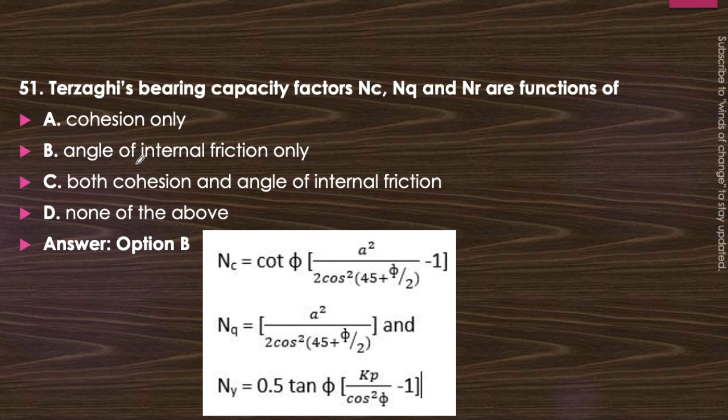Okay, so answer B will be the correct answer. It is dependent on angle of internal friction only. These are the constants A and Kp, these are the constants, only it will depend upon the phi value, that is angle of internal friction, and cohesion has no role to play in Nc, Nq and N gamma.

Okay, next question. Valid range of S, the degree of saturation for soil in percentage is: S more than 0, S less than 0, S lying from 0 to 100, or S lying from 0 to 100 including 0 and 100. So what is S here? S is degree of saturation, that is volume of water divided by volume of voids. So what will be the answer here?

Just think about it. Degree of saturation will be 100% if all the voids are filled by water, and degree of saturation is 0% if all the voids are filled by air, there is no water in it. So these both are possible values. So the answer here has to be lying from 0 to 100 inclusive, that is option D will be the correct answer. It is volume of water divided by volume of voids.

Volume of voids is composed of volume of water and volume of air. So this will vary from 0 to 100. When it is 0, it will be dry soil. When it is 100, it is fully saturated soil.

Next question. If the natural water content of the soil mass lies between the liquid limit and plastic limit, the soil mass is said to be in liquid state, plastic state, semi-solid state or solid state. It is a very easy question. You just memorize the graph of volume change with respect to the moisture content. In that graph, there were lines, liquid limit, plastic limit and shrinkage limit, and there were regions of liquid, plastic, semi-solid and solid. So just think about it.

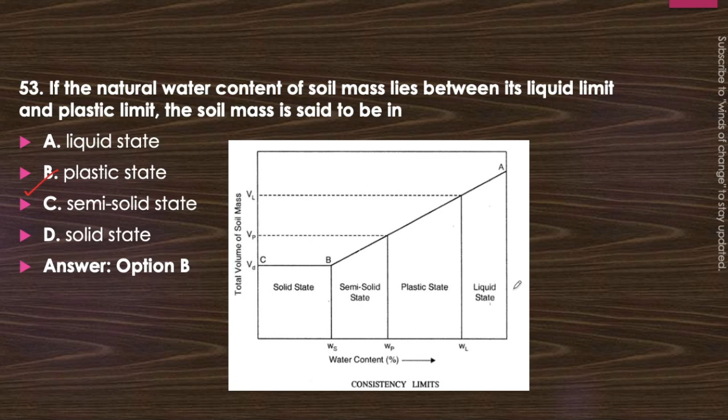So the answer between liquid limit and plastic limit is plastic state. Okay, option B will be the correct answer. Just memorize this graph. This is very important. Keep it in your mind. This is liquid limit, plastic limit and shrinkage limit. Now above liquid limit, this side it is liquid state. Between liquid limit and plastic limit, this is plastic state.

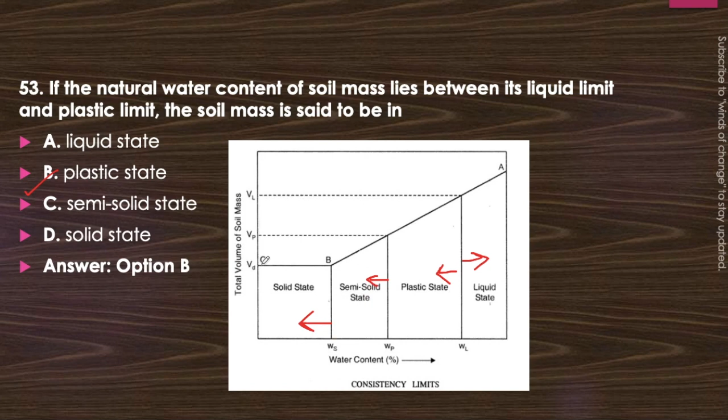And from plastic limit to shrinkage limit, it is semi-solid state, and below shrinkage limit it is solid state. Okay, there will be no volume change below shrinkage limit. Memorize this. These are very important. And at this shrinkage limit, the volume is called dry volume. Okay, so memorize it. Next question.

The flow net for an earthen dam with 30-meter water depth consists of 25 potential drops and 5 flow channels. The coefficient of permeability of the dam material is 0.03 mm per second. The discharge per meter length of the dam is, we have to determine small q, that is discharge per unit length. The options are 0.00018 m cube per second, it is written wrong, 0.0045 m cube per second, 0.18 m cube per second or 0.1125 m cube per second.

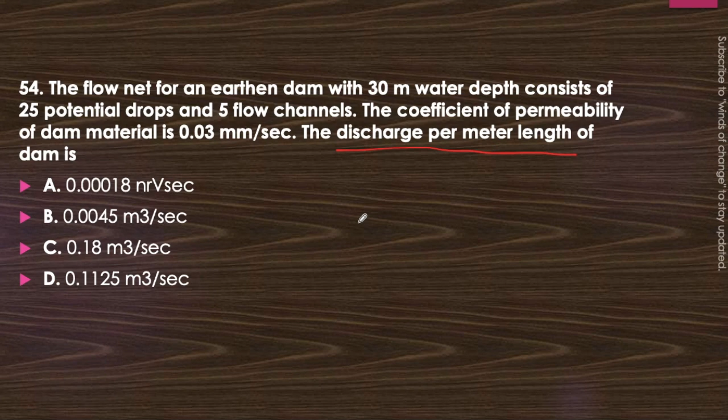So just think about how you will solve it. You should know the formula here, the formula for discharge per unit length if you have been provided with K value, that is coefficient of permeability, number of potential drops, number of flow lines and water depth. Can you recall it? Think about it. You can pause this video and solve it. I am moving to the solution. It is q equal to K H Nf by Nd.

Memorize it in the seepage calculation. This formula is very important. That is discharge per meter of length. This is permeability, coefficient of permeability K into water depth into number of flow lines divided by number of potential drops. Okay, so keeping this in your mind, we should solve it.

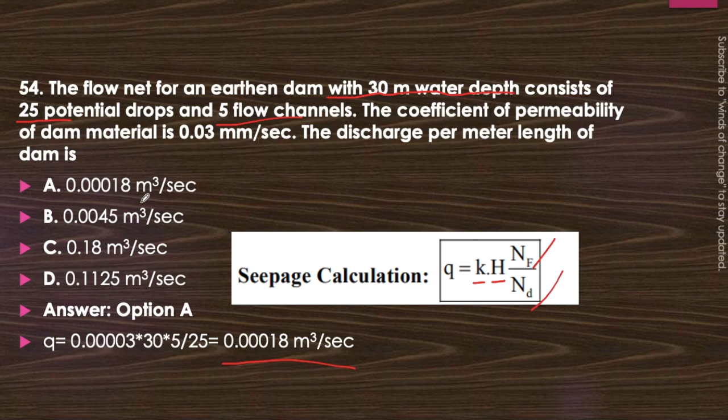Q equal to K value is 0.03 mm per second, so we should convert it into meter per second, into H, that is 30, it is the water depth, that is 30 meter. NF, number of flow lines, that is given 5 flow channels, and ND, that is number of potential drops, that is 25. So this answer will come out to be 0.00018 m cube per second. Okay, this will be the answer.

Okay, next question. Average coefficient of permeability of natural deposit parallel to stratification is always greater than that perpendicular to stratification, or parallel to stratification is always less than that perpendicular to stratification, or is always same in both directions, or parallel to stratification may or may not be greater than that of the perpendicular to stratification.

So coefficient of permeability in horizontal and vertical direction, if we have to find out the equivalent coefficient of permeability, if there are so many layers, then there are two formulas for it. One is weighted average and second one is the reciprocal mean. In both, which one will be having the larger value, that we have to determine. Now one is parallel to stratification, other one, the vertical, is perpendicular to stratification. What will be the answer?

Just think about it. Okay, KH value is more than KV value always, because arithmetic mean is more than reciprocal mean. It is always true. You can see here KH, that is for horizontal flow, it is K1H1 plus K2H2 up to KNHN upon total thickness, and KV is sigma H upon sigma H upon K, and KH is always more than KV. Memorize it, it is also very important. KH value will always be more than KV.

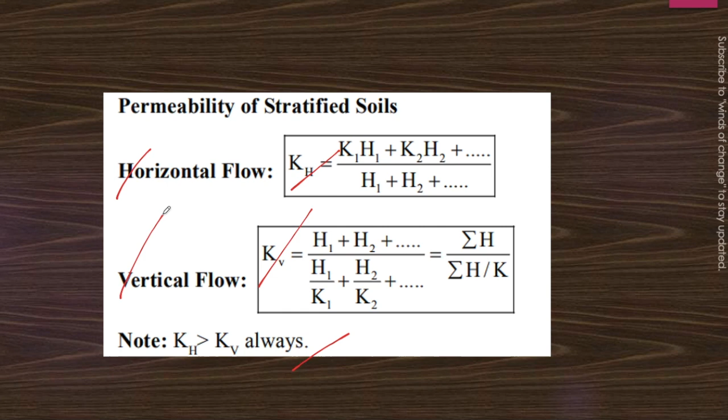Okay, so the first statement says that coefficient of permeability parallel to stratification is always greater than that perpendicular to stratification. Okay, this will be the correct answer. Parallel to stratification is the horizontal flow and perpendicular to stratification is the vertical flow. Memorize it. It is also important to memorize which flow is called what. Parallel is horizontal, perpendicular is vertical.

Okay. Next question. For proper field control, which of the following methods is best suited for quick determination of water content of soil mass? Here they are saying about the proper field control. That means we have to determine the water content in the field. It is not a laboratory case, it is for the field. Now all these options are mainly for the field except oven drying. Oven drying will be done in laboratory and obviously it will take a lot of time.

Now we have to determine quickly, can we go for sand bath method or alcohol method or calcium carbide method? So in this one the best suited will be, think about it. Okay, the best method here will be calcium carbide method. That will be best suited here. Option D will be the correct answer. With respect to the quick determination of water content at field in a proper controlled manner, it will be calcium carbide method. How is it so?

This is the calcium carbide apparatus and this test is done to determine the water content in the soil by calcium carbide method as per IS 2720-1973. It is a method for rapid determination of water content from gas pressure developed by reaction of calcium carbide with free water of the soil. Calcium carbide reacts with free water and produces a gas, and on that basis we find out how much pressure is developed by the gas, and the moisture content is in that proportion.

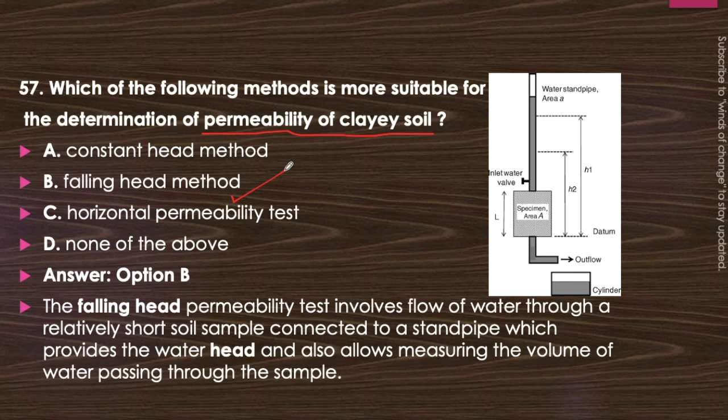The falling head permeability test involves flow of water through a relatively short soil sample connected to a stand pipe. This is called stand pipe, which provides the water head and also allows measuring the volume of water passing through the sample. In this there will be difference in the head, that is difference in the level of the water, and through the time in which this difference has been developed, we will determine the permeability of the clay soil. So for clay soil, the best suited method to determine permeability is the falling head method. Okay, moving on to next question.

If water content of a fully saturated soil mass is 100%, then the void ratio in the sample is, this is very easy question, less than specific gravity of soil, equal to specific gravity of soil, greater than specific gravity of soil, or independent of specific gravity of soil. If you remember one formula here, that is e by w equal to G by S, then you can easily determine it. Just think about it. You can solve it also on a paper. So I am telling you the solution here.

The relation is e by w equal to G by S. Now it is being said that it is fully saturated soil. Fully saturated means the S value, that is the degree of saturation, will be 1, that is 100%, and it is also said that water content is 100%, that is its value is also 1. This w is 1 and this S is 1. So what will be the result here? It will be e equals to G, that is void ratio is equal to specific gravity. So the answer will be equal to specific gravity of soil, that is option B. Got the concept, and this formula is very important. Keep it in your mind always. Next question.

Dispersed type of soil structure is an arrangement comprising particles having: face to face or parallel orientation, edge to edge orientation, edge to face orientation, or all of the above. Can you memorize it? Dispersed type of soil structure and flocculated type of soil structure were two types of soil structure which are very famous. Now think about the answer here. In the dispersed type of soil structure, what will be the arrangement of the particle? Think about it.

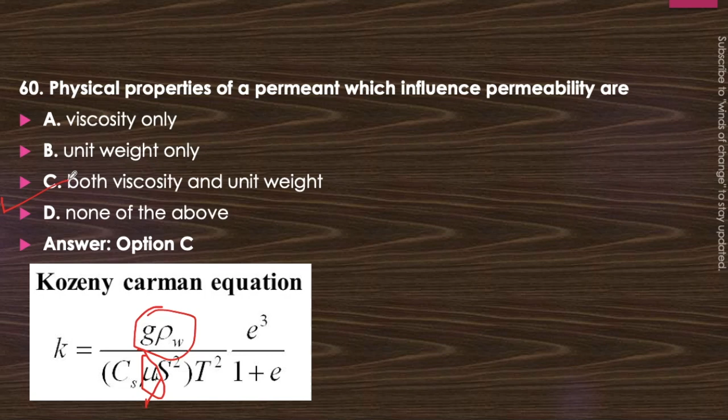So you can see here that these both are affecting the permeability of soil. So both will be the answer, that is both viscosity and unit weight. Okay, so C will be the correct answer.

Next question. If the volume of the voids is equal to the volume of the solid in a soil mass, then the values of the porosity and void ratio respectively are. We have to find out the porosity and void ratio, and it is being said that volume of void, Vv, equals volume of solid, Vs. In the case of Vv equal to Vs, what will be the answer? Now what is the formula for the void ratio?

Void ratio e equal to Vv upon Vs, that is volume of void upon volume of solid. Since Vv is equal to Vs, this value will be 1. And the formula for the porosity in terms of void ratio is porosity n equal to e upon 1 plus e. So it will be 1 divided by 1 plus 1, that is 1 upon 2, that is 0.5. And the answer having porosity as 0.5 and void ratio as 1 is option C.

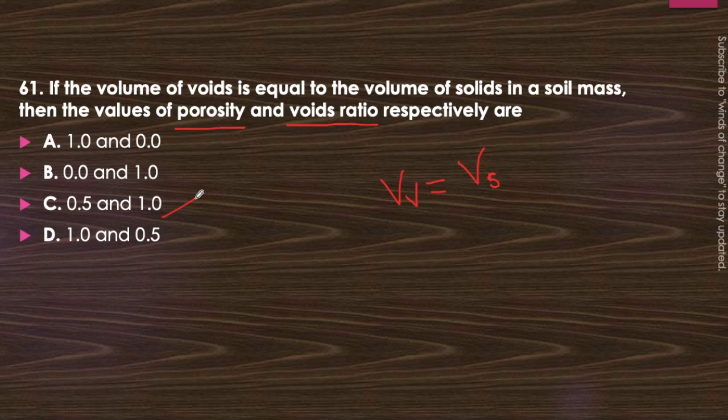Okay, since e equal to 1, these are the formulas here, and porosity n equal to Vv upon V. So if we find out the void ratio and porosity relation, we will come to know that n equal to e upon 1 plus e, that is 1 by 2 equal to 0.5. So it is very easy question. So moving further, next question.

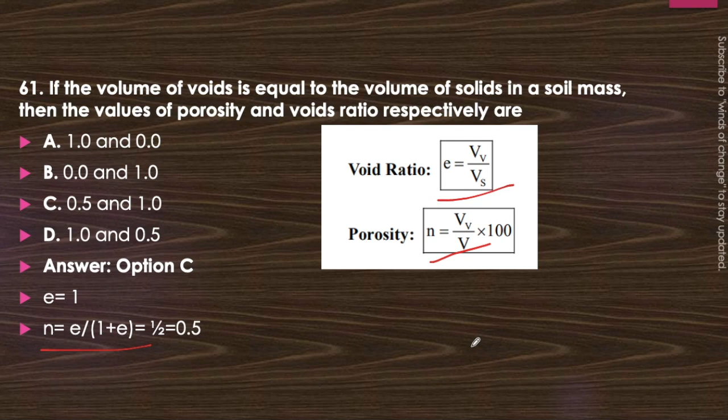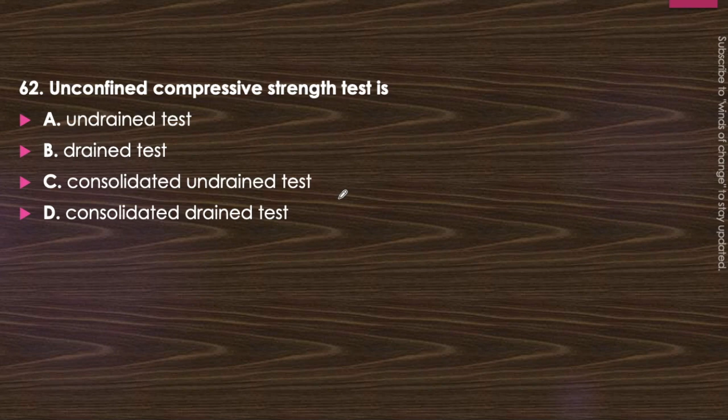Unconfined compression test is undrained test, drained test, consolidated undrained test, or consolidated drained test? This is important question. Just think about it. Unconfined compression test: in this test, there is no cell pressure and the soil is directly placed under the load in the form of cylindrical sample. Now think about the answer. Unconfined compression test is undrained test. Now how it is so?

The primary purpose of the unconfined compression test is to determine the unconfined compressive strength, which is then used to calculate the unconsolidated undrained shear strength of clay under unconfined condition. So there should be unconsolidated term added here. Unconsolidated undrained test could be the answer. Since both the options were having consolidated, these were not possible. Drained condition is not possible, so the answer becomes undrained test.

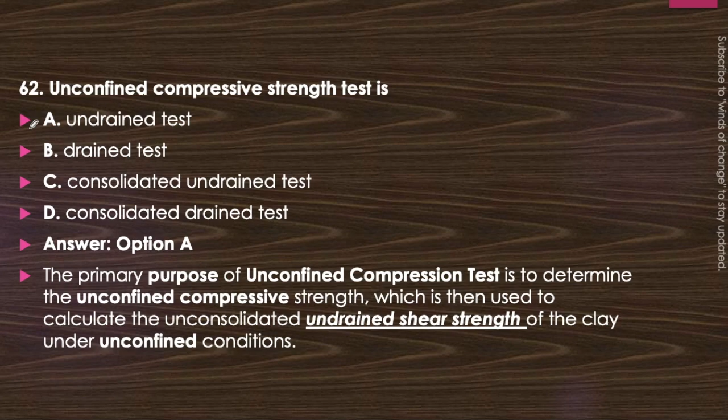Moving further. In a triaxial compression test, when drainage is allowed during the first stage, that is application of the cell pressure only, and not during the second stage, that is application of the deviator stress at constant cell pressure, the test is known as consolidated drained test, consolidated undrained test, unconsolidated drained test, or unconsolidated undrained test. This is very easy question. First condition is for first term and second condition is for second term. Which one will be the answer? Think about it.

First condition given here is drainage is allowed, and in the second condition drainage is not allowed. So second condition, drainage not allowed, it will be undrained test. So possibilities are either B or D. A and C are not possible because both are drained condition in the second term, that is when the deviator stress is applied.

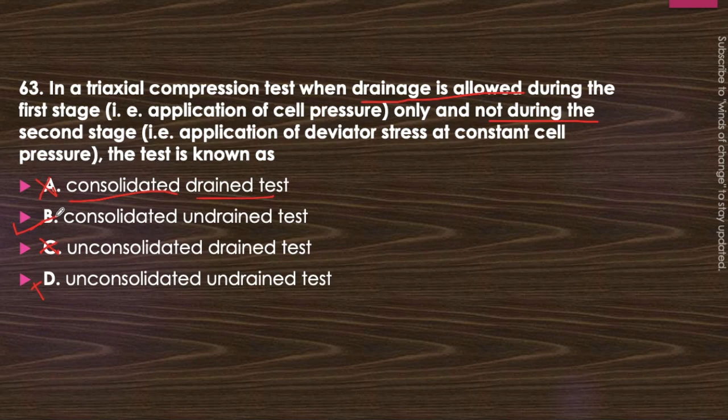Now in the first condition, if the drainage is allowed, then there will be consolidation. If you allow the drainage, there will be change in the volume, and consolidation will occur. So the answer will not be D, it will be B, that is consolidated undrained test. Option B will be the correct answer here.

Moving to the next question, the total discharge from two wells situated near to each other is: sum of discharge from individual wells, less than the sum of discharge from individual wells, greater than the sum of discharge from individual wells, or equal to larger of the two discharges from the individual wells. So let's think about it.

If there are two wells, if they are far apart, then obviously it will be the sum of these two discharges. That will become very easy. But since they are very near to each other, there will be an effect of one well on the other and the other well on the first one, and through that interference there will be some effect that will either lead to a higher or lower value.

Now what will be the answer here? Will it lead to higher discharge, that is more than the sum of these two, or lower than the sum of these two? The maximum value that can be obtained here is the sum of the discharges from the individual wells, which is not a possible condition here, because it can only be obtained when both wells are very far apart from each other, so that the radius of influence of one well does not coincide with the radius of influence of the other well. Only then will this condition be applicable.

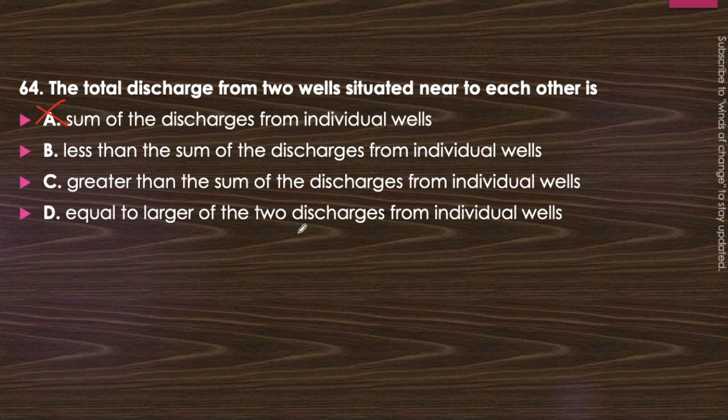Now without wasting much time, let's focus on the answer. The total discharge will be less than the sum of the discharges from the individual wells. Think about it. Generally, well fields designed for water supply purposes should be spaced as far apart as possible to minimize the well interference. Well interference, this term is very important. We should minimize the well interference as much as possible because it decreases the total discharge, which in turn will minimize the drawdowns.

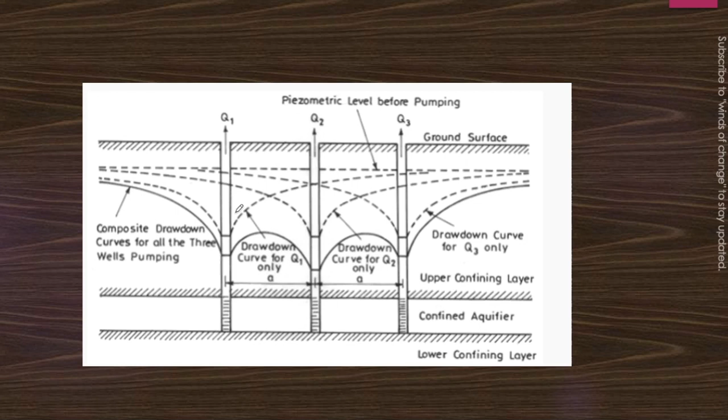If wells are spaced too closely together, the amount of well interference could be very high. The more the well interference, the lesser the discharge. You can see here, these are two wells which are close to each other. The influence of one will be on the other one. So there will be well interference, and this will lead to a lower discharge than the sum of these two discharges. So moving to the next question, that is question number 65.

The total and effective stress at a depth of 5 meters below the top level of the water in a swimming pool are respectively. Usually swimming pools are not made for a depth of 5 meters, but we are taking a condition here. At a depth of 5 meters, the total and effective stress will be either 0 and 0, or 0.5 and 0, or 0.5 and 0.5 kg per centimeter square, or 1 and 0.5 kg per centimeter square.

Now at a depth of 5 meters, think about it. There will be some total stress because of the pore water pressure from only the water present there. That pore water pressure will be equal to the total stress, and effective stress is the difference of total stress and pore water pressure. So obviously the effective stress will be 0 and there will be some positive value of total stress. So the correct answer here will be B.

Now let's find out how it is true. Pore water pressure is the total stress, since only water is there. Pore water pressure will be the unit weight of water in kg per centimeter cube into depth. The unit weight of water is 1 gram per centimeter cube, which in kg is 0.001, into the depth in centimeters. It is 5 meters, so 500 centimeters. So it will be 0.5 kg per centimeter square, that is the pore water pressure.

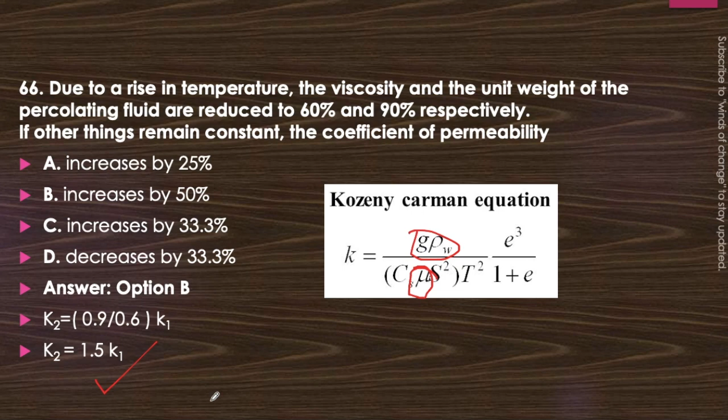At liquid limit, all soils possess: same shear strength of small magnitude, same shear strength of large magnitude, different shear strength of small magnitude, or different shear strength of large magnitude. Now at the liquid limit, will the shear strength value for each type of soil change or not? First of all, we have to find out that. Then whether it will be of small magnitude or large magnitude. So there are two questions in front of us.

First of all, think about the magnitude. Since at the liquid limit the soil has just started gaining plasticity; before that it was totally a liquid kind of soil with no plasticity. So the shear strength will be very low, approximately zero. So there are two possible answers, either A or C, in which small magnitudes are given. Now if we talk about shear strength, there will not be any change in the shear strength for different kinds of soil.

If the C value is the same, obviously this will be the same, that is, the same shear strength for different types of soil, of small magnitude. Answer A will be the correct answer. The undrained shear strength of soil at liquid limit can be considered to be around 1.7 kN per meter square for each type of soil.

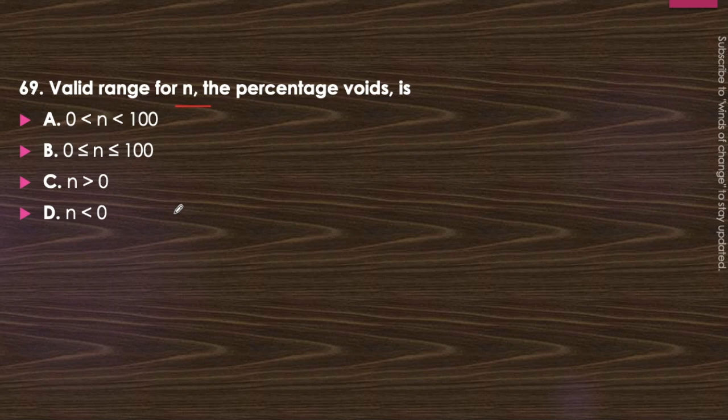Next question. Valid range for n, the percentage voids, that is the porosity. Porosity lies from 0 to 100, either excluding or including 0 and 100, or n more than 0, or n less than 0. Just think about it. It is volume of voids to the total volume of soil. If the volume of voids is equal to the volume of the soil sample, the value will be 100, meaning no solid is present. While if there is no void, it will be equal to 0. So in both situations, this value lies from 0 to 100.

But think about it, this value cannot be 0. Why? Because a case with no voids is not possible in the macro structure of the soil. There will always be voids present within the soil mass. Even with much higher compaction, there will still be some voids remaining. You cannot fill it totally 100% by removing all the voids. So obviously there will be some volume of voids, so it cannot be 0.

While 100% means there will be only voids and no solid. If there is no solid, then there is no soil, and obviously there cannot be a 100 answer. It is not a soil, it will become only air. So these two values are not included, and the value lies between 0 and 100.

Okay, next question. Rankine's theory of earth pressure assumes that back of the wall is plane and smooth, plane and rough, vertical and smooth, and vertical and rough. There are two assumptions in the soil which are very important. First of all, Rankine theory of earth pressure. Secondly, the assumption in Terzaghi theory. So these two are important.

Terzaghi theory I have asked in previous video, and in this video we will talk about Rankine's theory of earth pressure, the assumption in it. So what will be the answer here? The plane of the back of the wall is assumed to be, think about it, vertical and smooth. Okay, it assumes that there is no angle, it is totally vertical at 90 degree, and there is no roughness in it. Okay, option C will be the correct answer.

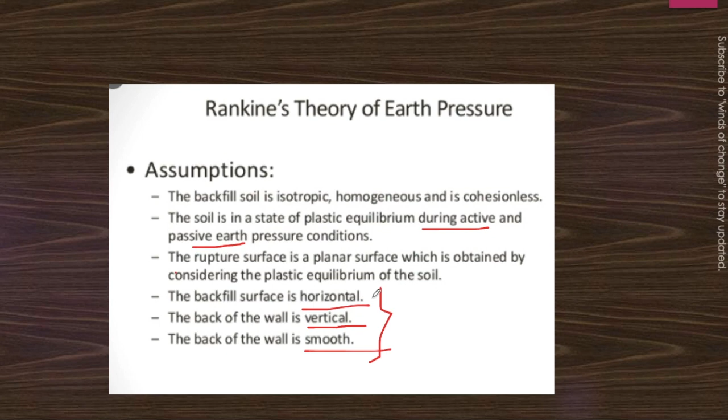Now moving further, the most suitable method for drainage of the fine grained cohesive soil is well point system, vacuum method, deep well system, or electro-osmosis method. Here we are talking about drainage of fine grained cohesive soil. Which will be the correct answer here? Most suitable method for it, either well point or vacuum or deep well or electro-osmosis. Just think about it. It is not so important question, but you should know it. The answer that will be

electro-osmosis method. In the electro-osmosis method, consolidation can be an effective and viable technique to drain, consolidate, and strengthen the saturated fine grained soil. As the water is drained out, a negative pore water pressure is generated, which introduces the consolidation process in the soil. In this, negative pore water pressure will be generated, and consolidation will occur. This process is used for strengthening the soil. Okay, so this is the most suitable method, that is electro-osmosis method.

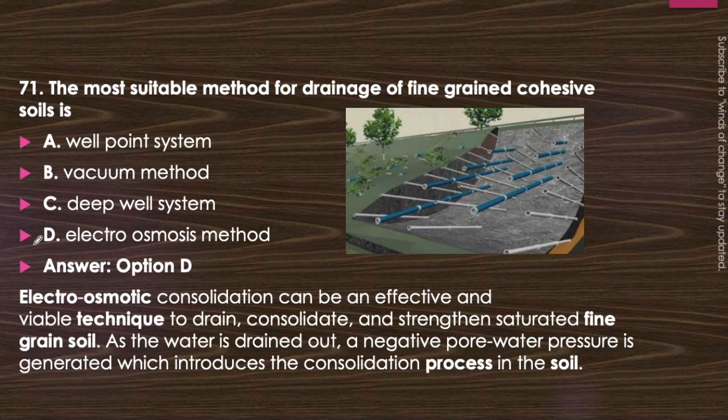Next question. With the increase in the amount of compaction energy, optimum moisture content increases but maximum dry density decreases. Optimum moisture content decreases but maximum dry density increases. Both optimum moisture content and maximum dry density increase, or both decrease. Now think about this question, very important question. If you remember the graph of dry density with respect to moisture content, there were so many graphs that can be obtained to find out the optimum moisture content at which the dry density will be maximum.

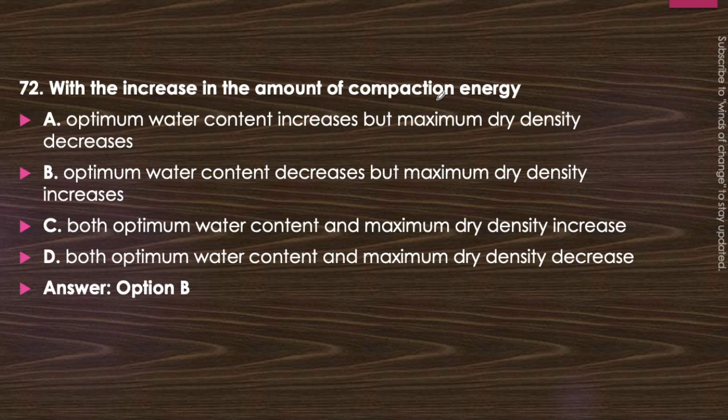Now think about the answer here. If we increase the compaction energy, then we are sure about one thing, that dry density will increase first of all. Okay, and optimum moisture content. If we go for the dry side of soil, then obviously the moisture content will decrease. Since dry density is increasing, there will be lesser void, so lesser amount of water will be required. So optimum water content will decrease. So the answer will be option B. That is, optimum water content decreases but maximum dry density increases.

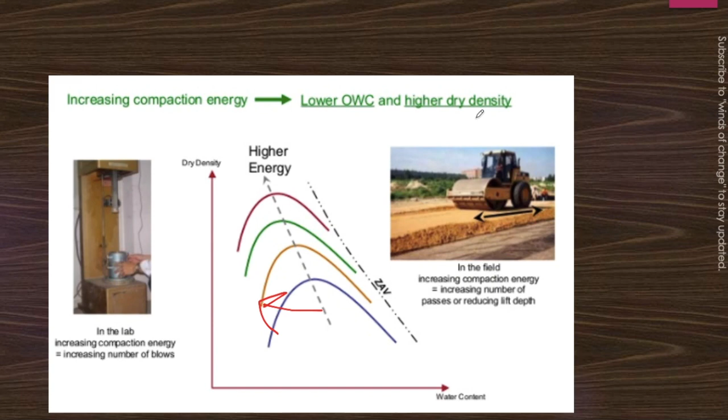How it is so? Let's see the graph here. We can notice that with increase in the compactive energy, this is for the lowest energy, then compaction energy is increased, and we can see this graph is shifting towards the left side. If the graph is shifting left, then we can say that water content is decreasing and dry density is increasing with increase in the compaction energy. Okay, so with increasing compaction energy, lower optimum water content and higher dry density will be obtained.

So next question, which of the following method is most accurate for the determination of the water content of the soil in laboratory? Oven drying, sand bath, calcium carbide or pycnometer method? Now here we are talking about water content determination in laboratory. Last time we were discussing the most accurate method in the field. Now in the laboratory, which method will be most suitable?

Just think about it. Very easy question. In the laboratory, we go for the oven drying method. Option A will be the correct answer. We will go for the oven drying method in the laboratory. This will be the most suitable method here, the most accurate method here.

In the oven drying method, this technique is done to determine the water content of the soil as per IS 2720 Part 2. You can read it if you want to go into the detail of this method. This is also very important. You can pause this video and watch this IS code, that is IS 2720, in which the oven drying method and its procedure is mentioned.

The water content of the soil sample is equal to the mass of the water divided by the mass of the solid. So in oven drying, first of all we take the total mass, then it is oven dried, and then again the soil mass is taken and the difference is observed, which will be the weight of the water. The second time there will be only solid, so weight of water upon weight of solid can be obtained, which will be the water content. So this is the oven drying method to determine the water content of the soil in the laboratory, and this is the most accurate method.

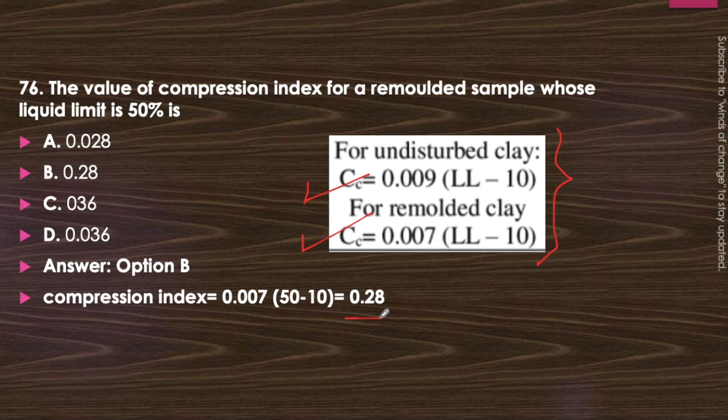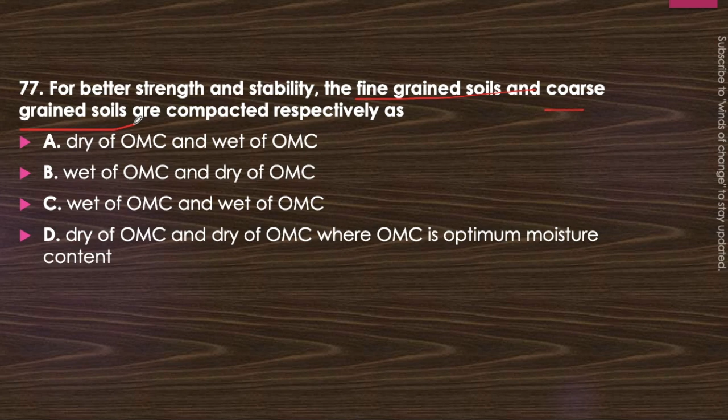There will be some gradation of the soil, so obviously the smaller size particles can fill the voids of the larger size particles. It will be accelerated by the amount of water. So wet of optimum moisture content will be applicable in case of the fine grained soil.

But in the coarse grained soil, since it has larger size particles, we will go for dry of optimum moisture content. So the answer here will be option B, that is wet of optimum moisture content for fine grained soil and dry of optimum moisture content for coarse grained soil. Okay, memorize it. It is also very important.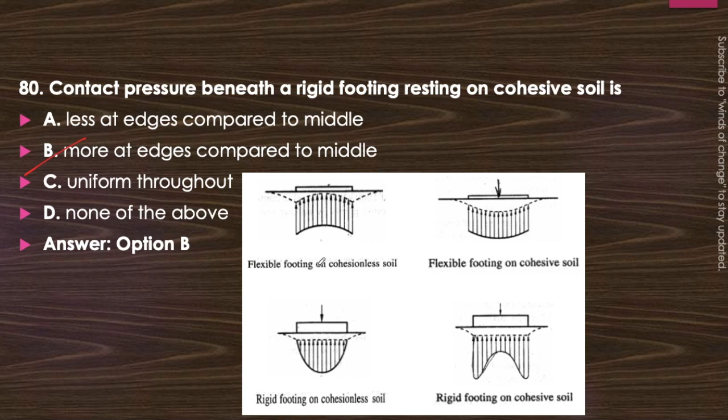While in case of the rigid footing, there will not be uniform pressure throughout, there will be pressure varying. It will be more at the center and less at the edges in case of the cohesionless soil. While in case of the cohesive soil, that is our case here, there will be more pressure at the edges and less at the center. Okay, so it will be answer B, that is more at the edges as compared to the middle. And these four conditions are very important. Memorize it. I am moving further.

Next question. Select the incorrect statement. Effective angle of shearing resistance increases as the size of particle increases, as the soil gradation improves, is limited to maximum value of 45 degree, or is rarely more than 30 degree for fine grained soil. Now we have to find out effective angle of shearing resistance. This phi value, that is angle of internal friction, or angle of shearing resistance, will be obtained from the formula tau equal to C plus sigma tan phi. This value will range from which limit? Think about it a little.

Let's find out the answer here, that is it is limited to maximum value of 45 degree. Now how it is so? This tau f value is equal to C plus sigma tan phi. Now if we write the formula for tan phi, it will be tau minus C upon sigma. The maximum value of tau minus C can be available when these two will be maximum, and the cohesion will be negative if it goes to this side. So the maximum value that can be observed for tan phi is when C equals 0 and sigma becomes equal to tau.

So the maximum value that can be obtained will be tau f upon sigma equal to 1, that is tan phi will be 1, and that means the phi value will be 45 degree. So the maximum value that can occur for phi, that is angle of internal friction, will be 45 degree. Always memorize it. Moving to the next question.

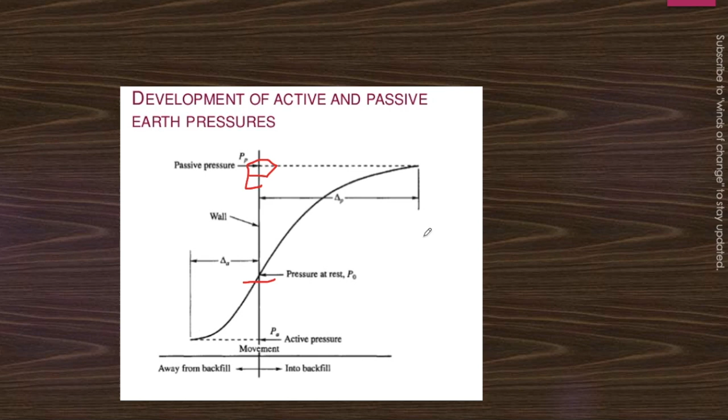When the plastic limit of a soil is greater than the liquid limit, the plasticity index is reported as negative, 0, non-plastic, or 1. Now just think about it. It is said that plastic limit is greater than liquid limit. Is it possible? We have already seen the graph of volume change with respect to water content, on which the Atterberg limits were placed. If the liquid limit and the plastic limit become equal, the plasticity index is 0. That is the condition of non-plastic soil.

But since they are talking about plastic limit greater than liquid limit, which is not a possible condition, we will say this value will be 0. The plasticity index, which is the difference of the liquid limit and plastic limit, will be 0. We should not think about this situation further, because the plasticity index will always be more than or equal to 0. So this minimum value, 0, will be the answer.

Next question. Void ratio of the soil mass can never be greater than unity, be 0, take any value greater than 0, or take values between 0 and 1 only. Think about the formula of void ratio: volume of voids upon volume of solids. Can volume of voids be greater than volume of solids? Yes, it is possible, so its value can be greater than unity. The first option is incorrect. B, 0, is not possible, because there will always be voids in the soil, filled by air or water. A soil with zero voids is not a natural possibility.

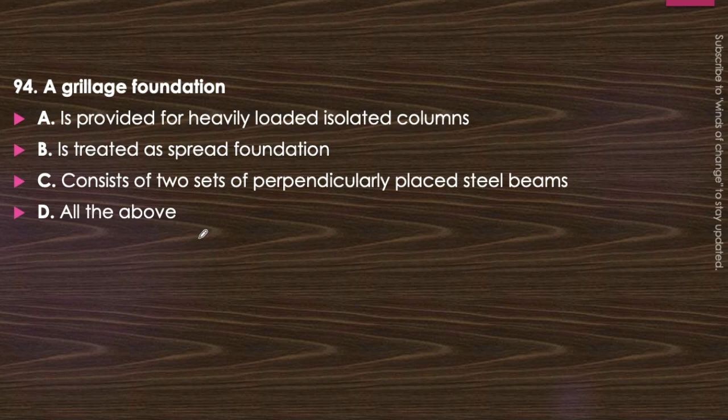Next question. A grillage foundation is provided for heavily loaded isolated columns, is treated as spread foundation, consists of two sets of perpendicularly placed steel beams, or all of the above. This is the first question on grillage foundation, and everything written here is about the grillage foundation. So the answer will be all of the above, that is option D.

Grillage foundation looks like this. These are provided when heavily loaded isolated columns are being placed. There are layers of perpendicularly placed beams, two sets of perpendicularly placed steel beams. First it will be provided in this direction, then at 90 degrees to it, then again at 90 degrees to it, and this will increase in the width.

So this form of arrangement is called a grillage foundation. It is treated as spread foundation. Option D will be the correct answer here.

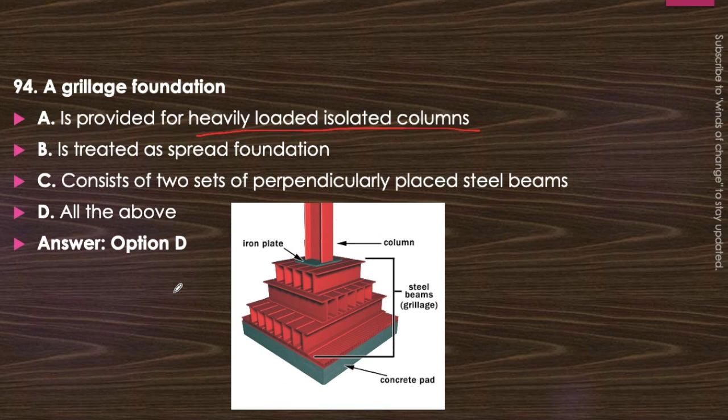Next question. The angle that Coulomb's failure envelope makes with the horizontal is called cohesion, angle of internal friction, angle of repose, or none of the above. Very easy question. Just think about the failure envelope in the graph of the Mohr circle obtained from Coulomb's failure envelope. Can you recall it? C and phi values are present there.

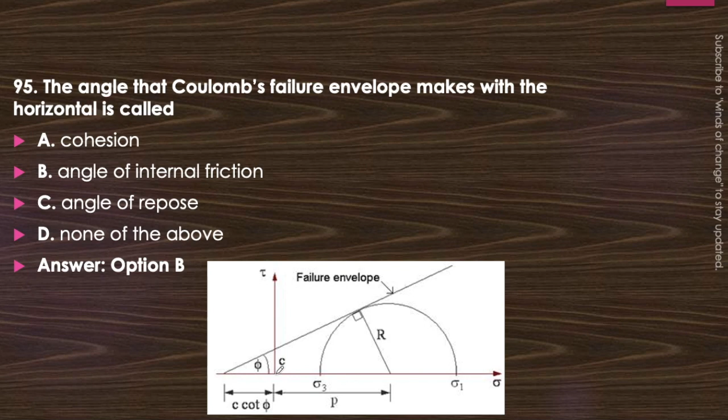It will be called as angle of internal friction. Okay, this is the failure envelope which will be obtained, and this angle, this phi angle, it is called the angle of internal friction. And where this failure envelope will cut the line of the shear stress, it will be called as C. Okay.

Next question. Which one of the following clay behaves like a dense sand? Very important question. Over consolidated clay with high over consolidation ratio, or over consolidated clay with low over consolidation ratio, or normally consolidated clay or under consolidated clay. Which one will be behaving like a dense sand? The answer is option A, that is over consolidated clay with high over consolidation ratio. This will be behaving as dense sand.

Next question. Which of the following soils has more plasticity index? Sand, silt, clay, or gravel? This is a very easy question. Plasticity index value for different type of soil we should discuss here. Maximum value will be for the clay only. For sand it is 0. For silt it is less than 7. Plasticity index value for silty clay is 7 to 17, and for clay it is more than 17. Okay. Memorize it. It is very important.

Next question. Coefficient of permeability of the soil: does not depend upon temperature, increase with increased temperature, increase with decrease in temperature, or none of the above. Will it be dependent upon temperature or not? Just think about it. It is also related to the Kozeny-Carman equation only. In that equation, have you noticed there was a term of viscosity? And what is the effect of temperature on the viscosity? Viscosity is decreased with increase in temperature, and viscosity was in inverse relation to the permeability.

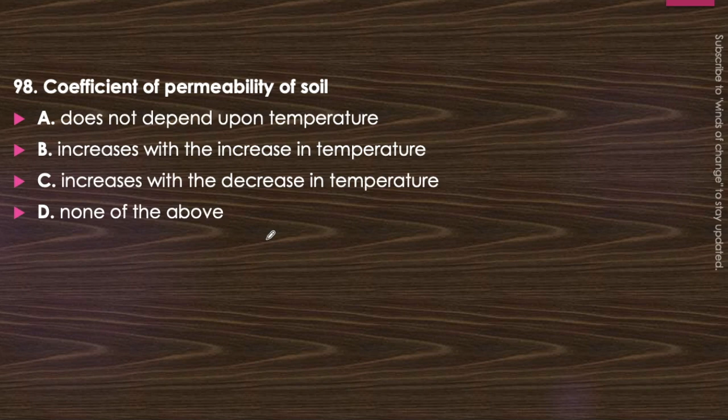So what will be the answer here? It will increase with increase in temperature. Since viscosity is present here, this T is not the temperature. The term related to temperature is only the viscosity, and since it is in inverse relation and viscosity is also in inverse relation to temperature, permeability will be in the direct relation with the temperature.

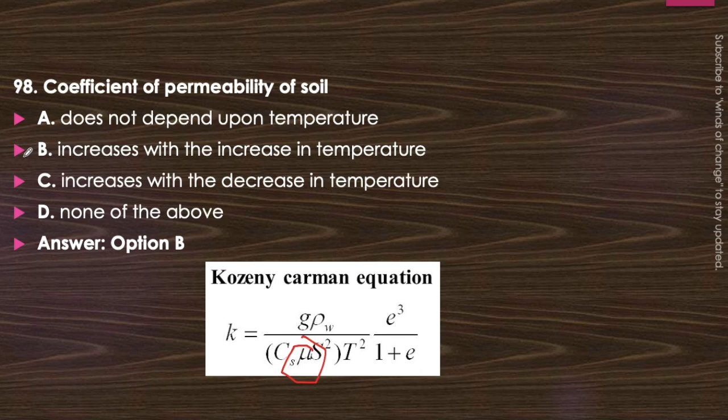Okay. Next question. The ultimate consolidation settlement of a soil is directly proportional to the void ratio, directly proportional to the compression index, inversely proportional to compression index, or none of the above. Just think about it. Answer will be option B, that is it is related to compression index directly. This is the formula for ultimate consolidation settlement, that is Cc H upon 1 plus e naught, log of sigma naught dash plus delta sigma upon sigma naught dash. This is the effective stress, this is change in effective stress.

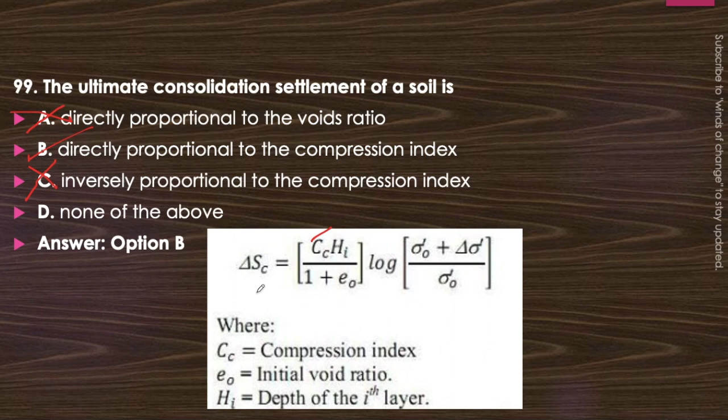Okay. Here we can see that it is inversely related to the void ratio. So option A will be not applicable. Directly proportional to the compression index, which will be the correct answer. Inversely will be the incorrect answer. So answer B will be the correct answer here, and this relation is very important. Please memorize it for ultimate consolidation settlement of a soil.

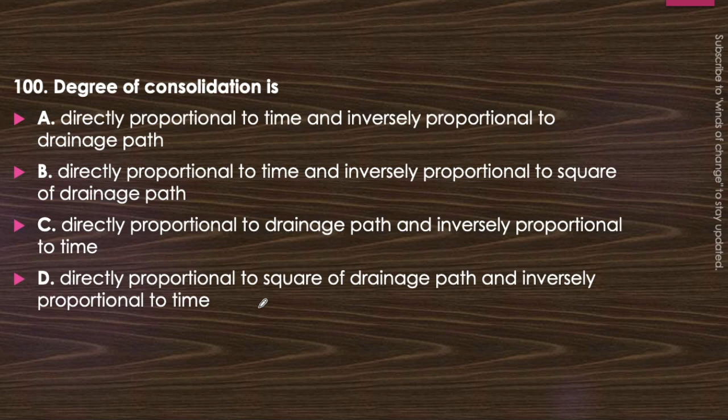Next question, and the last question of these 100 questions of soil mechanics. Degree of consolidation is directly proportional to time and inversely proportional to drainage path, or directly proportional to time and inversely proportional to square of drainage path, or directly proportional to drainage path and inversely proportional to time, or directly proportional to square of drainage path and inversely proportional to time. This is a very easy question. Can you memorize the formula of Tv? Tv is related to degree of consolidation because Tv equals pi by 4 U square.

Okay, so through that formula you can obtain that Tv is related to U, and U is directly proportional to t and inversely proportional to H square. So the answer will be directly proportional to time and inversely proportional to the square of the drainage path. That is the time factor or the degree of consolidation. Option B will be the correct answer here. So we will finish here with the 100th question of soil mechanics.